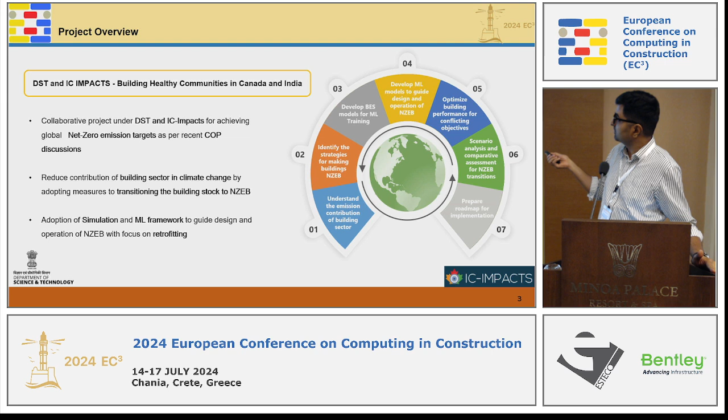There is a step where we require developing machine learning models to guide the design and operation of net zero energy buildings, in lieu of traditional energy modeling. That is where this particular paper at this conference is coming from, and we are at this stage for this project right now.

A little context for the study—some of it has already been covered in terms of buildings and their energy intensity. One point I'd like to highlight is that building energy simulation is a common technique used across different researchers in different countries. It's a technology that helps us understand building energy requirements and so on. But one aspect is that energy prediction is computationally intensive—it takes time and cost. That is one limitation of building energy simulation when looking at a lot of buildings. An accurate building energy forecasting system can save about 30% of total energy consumption, so it's a tool that can help in this overall perspective.

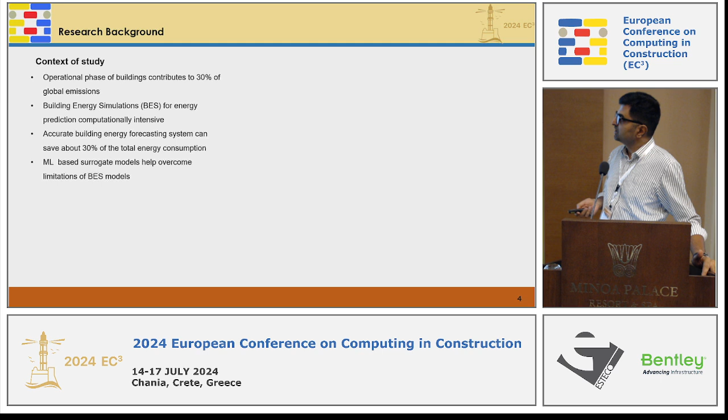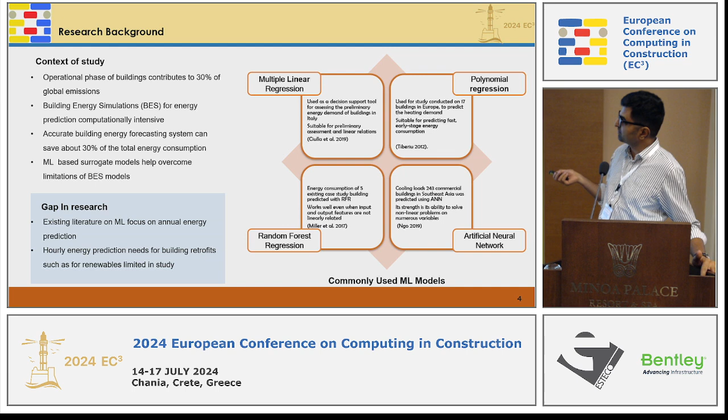Machine learning based surrogate models help overcome some limitations of BES models. Several studies have used machine learning based techniques to surrogate this entire process, so you can use that for quick design solutions. Looking at the gap in research, existing literature on machine learning focuses on annual energy prediction—a particular value for a year based on different input parameters. This is a gap we are trying to address in this study by using hourly energy prediction, especially targeting building retrofits such as renewables. That's the major focus point of this study. These are some of the literature that has done machine learning based techniques for energy prediction.

There are 4 stages for this study. In stage 1, we developed a reference building model. Especially from tropical countries such as India, there aren't many studies, and data availability is a big issue. There isn't any study that has done machine learning based surrogate techniques for different types of buildings in India. That's one aspect we started with. We developed a validated prototype commercial building model based on data collected from another study, and this model has been subjected to several simulations based on different climatic conditions.

As with any other ML study, we generated a dataset for 1 year at hourly precision, and selected data for 4 climatic locations. We have input data points, and the output is basically the energy consumption. We tested 4 machine learning algorithms, since several studies have reported various machine learning techniques.

So you basically have to understand which one is better in terms of surrogate modeling, and we have used a few evaluation metrics as well.

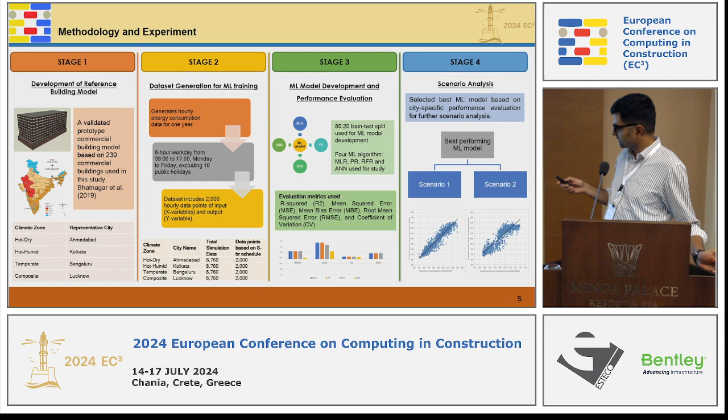This is details of the reference model. I'll go a little bit quick here. These are some of the typical details of the building model.

For the data generation for machine learning training, the total simulation data points are 8760, basically the hours for a particular year. We have used an 8-hour schedule from 9 a.m. to 5 p.m., which means we ended up with 2000 data points. Out of that, we have selected these input variables, and the output variable is basically the hourly energy consumption.

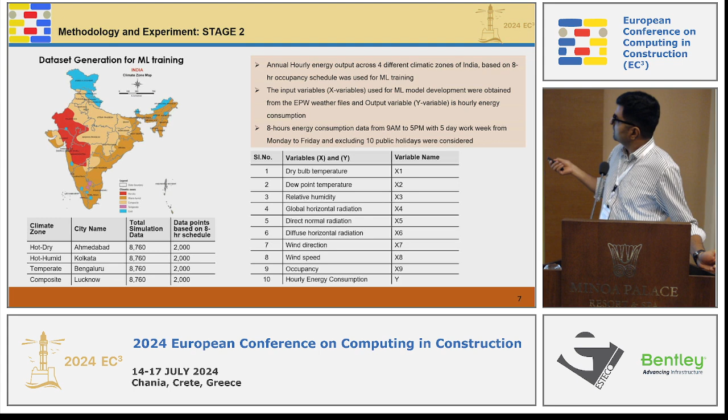We have done machine learning based model development here. We have used 80-20 training and testing, as we have heard from the previous study as well, which is basically the standard method that you use. And we have developed 4 machine learning algorithms: multiple linear regression, polynomial regression, random forest regression, and artificial neural network.

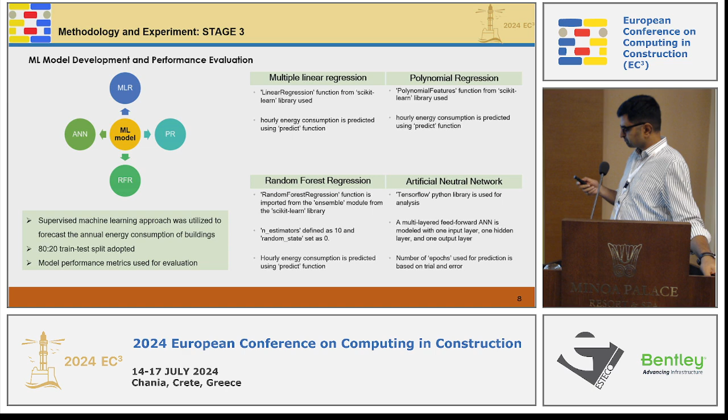This is some explanation of the methods, a little bit more detail into how we have done it. We have basically used the Python-based Colab system. So coming to the results.

Once we have identified the best machine learning algorithm, which is the RFR, we have done 2 scenarios to check the overall prediction capability of the RFR model. In scenario 1, we have used all the data, and we have done it for 4 climatic locations: Ahmedabad, Kolkata, Bengaluru, and Lucknow, which are basically the ASHRAE-based weather systems in India.

In scenario 2, we have used the data from 3 cities to see whether that machine learning model is helping us predict the energy consumption of the 4th city. That's what scenario 2 is. And it is, with sufficient accuracy, helping us predict the 4th city. So that's one of the takeaways from the study.

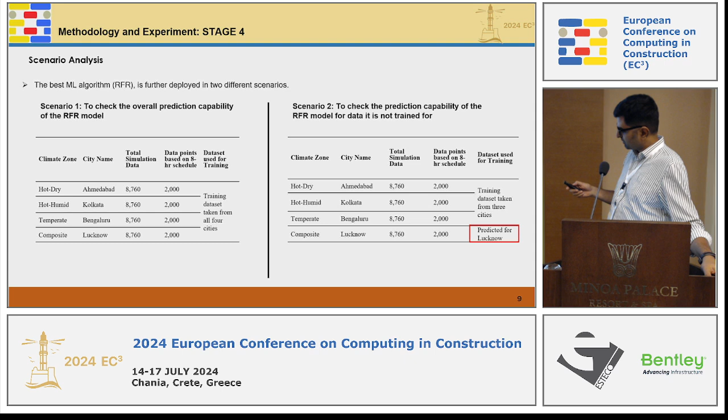The typical model performance and evaluation metrics that we have used follow the ASHRAE guidelines, such as the coefficient of determination, mean square error, root mean square error, mean bias error, coefficient of variations, and so on.

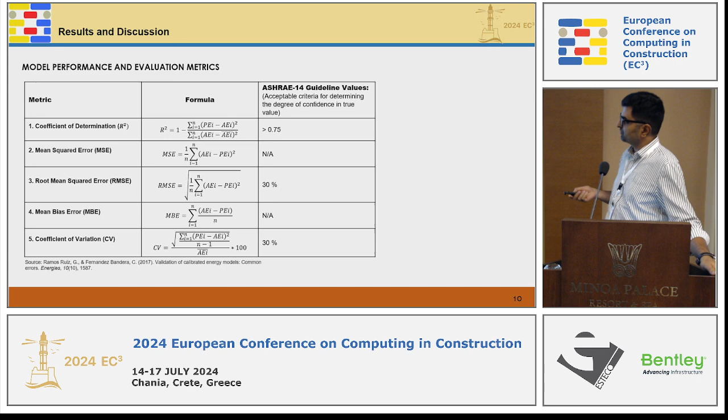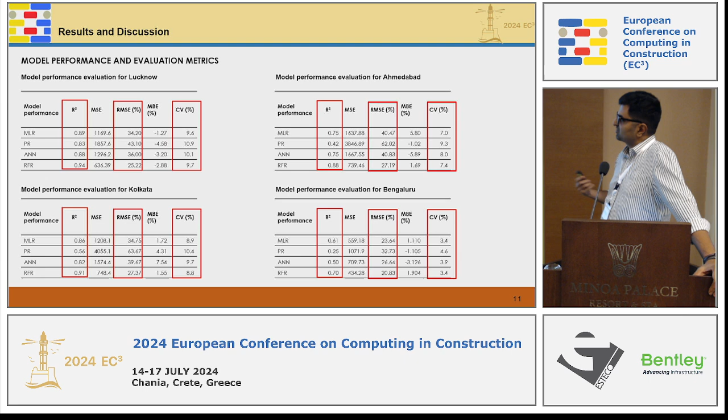Coming to the model performance and evaluation metrics, what you are seeing here is for 4 locations: Lucknow, Ahmedabad, Kolkata, and Bengaluru, which are the climatic locations. Based on these, the evaluation metrics that we have established, we found out that RFR is the best performing model in terms of all the metrics. And we have chosen that.

For a particular city, Lucknow, we have plotted this to see. What you are seeing here is the red line, which is the RFR, showing a nice plot in terms of the actual as well as predicted value.

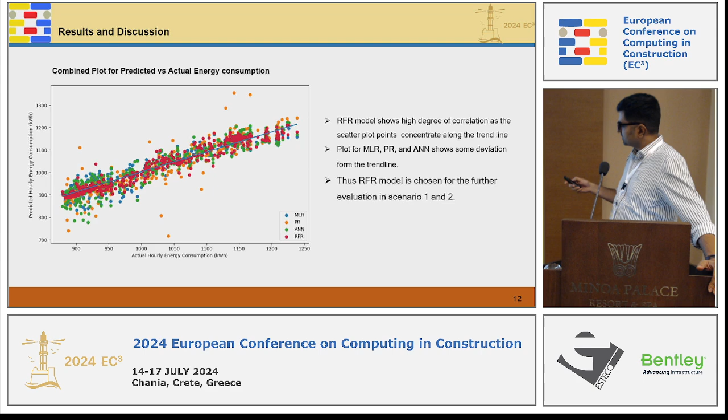Now we have chosen this RFR model for conducting the 2 scenarios that I've talked about. In scenario 1, we checked the overall prediction capability of the RFR model. This is basically taking all the data from all the locations and trying to predict using the 80-20 rule.

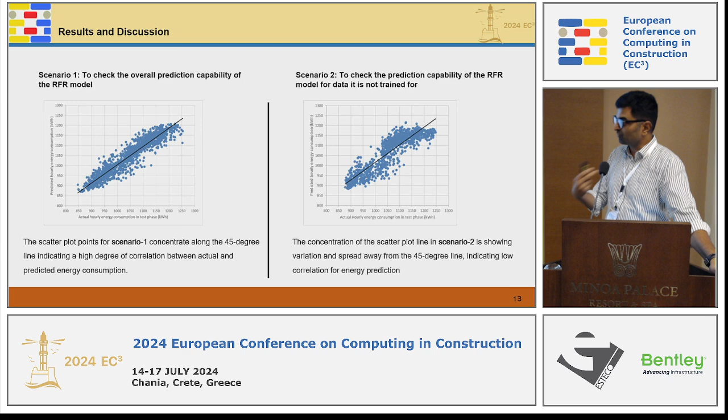In scenario 2, we have taken data from 3 locations, and for the 4th location, we have tried to predict. There is some decrease in accuracy, but it still comes within range. So the application of this technique is that you can predict for one more location or a few more locations based on the data that we have.

Coming to conclusions, we have used ensemble-based models such as the RFR model. This is suitable for energy prediction in hourly resolution, and we have tested the 2 scenarios that I talked about.

For future works, we can use some other methods as well. Literature has also been using that, and that's one of the things we are doing. As I talked about in that big project, we are planning to do it for Canada as well, and further optimization and so on.

As a summary, the study has used an archetype commercial building. It can be extended to other building typologies and weather locations as well.